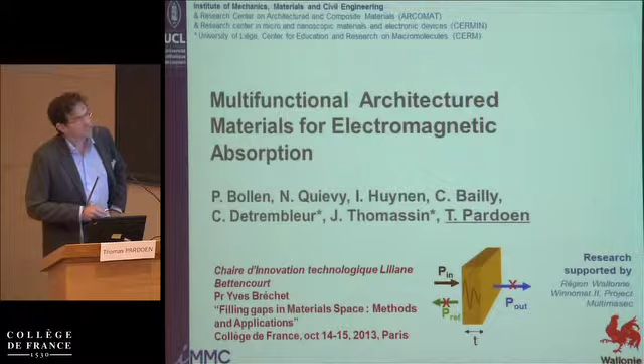But so I will start by acknowledging the collaborators. A major part of the work has been carried out by Pierre Bollen, who is a PhD student now in his last year of his thesis. And Nicolas Quievy was a postdoc. Isabelle Huynen, she is the one who knows everything about electromagnetism. Christian Bailly is a polymer specialist. Christophe Detrembleur and Jean-Michel Thomassin are chemists. So it's a group of a variety of expertise.

Before I introduce you to my preferred gap, I will explain you the general ideas of what we have tried to accomplish for the last few years. There are two ways to protect an object or human people or anything else to EMI, to electromagnetic interference, or to protect and to shield an object. The first one is the one you know the best, is just protect the material by a reflective layer such that all the incoming electromagnetic power is just reflected. And this would typically be the Faraday cage approach, where you use a metal and you just reflect everything.

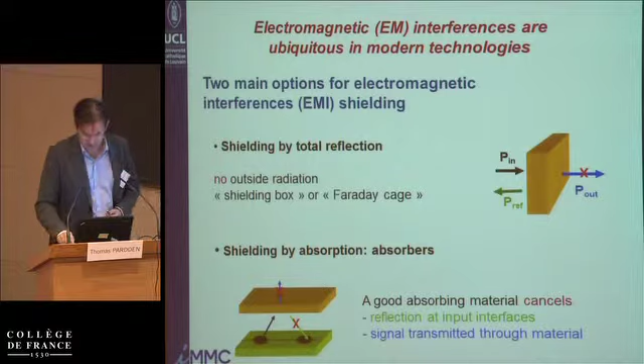The other approach, and I will explain you why it is sometimes interesting, is to absorb the electromagnetic radiation. So to let the wave enter the material and just dissipate the energy into the material. But 99% of applications are based on reflection. Now, why is it sometimes useful to absorb and not to reflect the electromagnetic radiation? First example is in microelectronic or power electronics application.

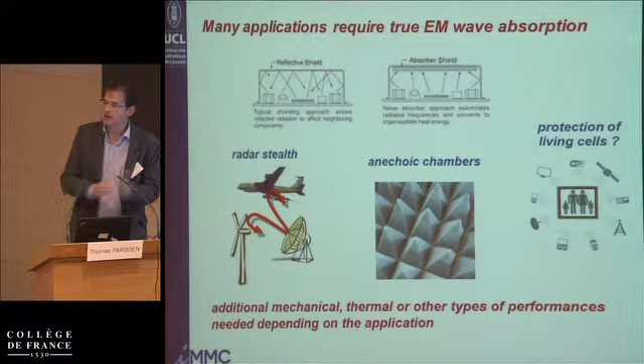The fact that you will put a sort of shield around the devices would lead to reflection inside the system. So for most applications, it's absolutely forbidden to have waves getting out of the system, so you will reflect, but you might have interferences from one device to another inside a chip. And so that means that the fabricant of these systems, they have to put barriers in between all the chips, and still like that they sometimes face some trouble. So it would be better to have in some application an absorbing material and avoid these bad reflections.

Sometimes also you can have problems like in windmills. For instance, it's known that windmills affect the radar operation. That's why you cannot put a windmill within a radius of 15 kilometers around airport. So around every airport, you have to draw a circle of 15 kilometers radius. And you cannot put a windmill, and this is because of the interference. So it would be a good idea to absorb the radiation and not to reflect it on windmills.

People working with electromagnetic devices and testing many different systems, they use anechoic chambers, and these chambers are designed with these very strange walls. You might have seen that before, such that the waves are absorbed and not reflected in order to allow calibrating devices and so on.

And of course, you know that there are claims that electromagnetic radiation might affect living cells. My colleague Isabelle Huynen is in one of the team in Europe who has been working a lot on this topic for many, many years, and they have mixed claims. So they have seen some evidences of disease in rats and so on, but it's not so obvious. But there might be, and I will not enter one of the favorite topic of Yves, of the principe de précaution today. Otherwise, this talk can last for hours probably. So, but there might be some aspect there.

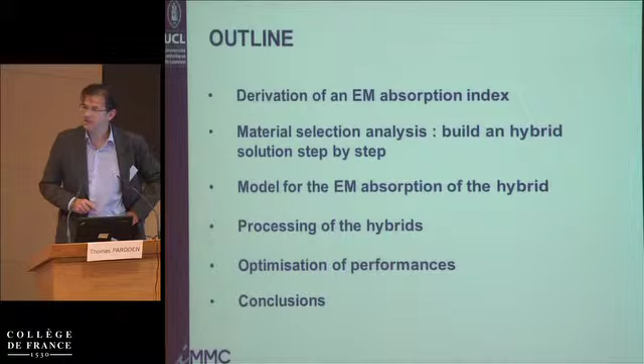Okay, I will start by showing you how we derive a material index, which quantifies the quality of absorption. And then from there, we will see if a material exists. And the answer, you know, will be no, to optimize this index. Okay, I will not enter the details of the analysis, but basically you have to use a line transmission formalism.

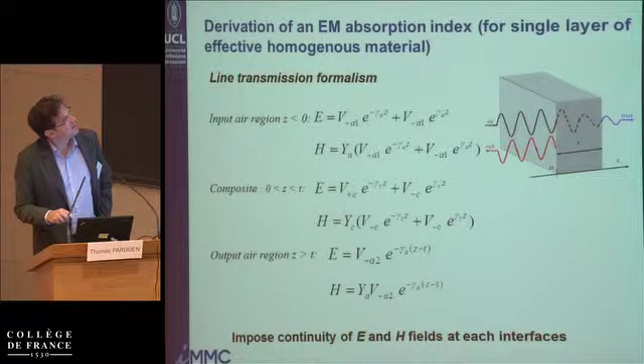You have an input signal, and this signal will transmit and reflect through the material, and you just have to set up the boundary condition to make the field, the electrical and magnetic field, equal at the entrance and the outside surface of the material. I'm not entering in the detail because you probably don't want to hear that.

But at the end, what we calculate is the absorbed power. The absorbed power is the input power minus the reflected power minus the transmitted power. So it is really the power that is dissipated into the material here. And we define the absorption index, and that will be the performance index of the problem. It is the absorbed power divided by the input power, meaning that 1 would mean that there is no power that is reflected and no power transmitted. So the goal is to be as close as possible to 1.

And at the end, if you work out the equations, and this is all analytical, you're getting a messy performance index, but still it is analytical. And you see that this absorption index depends on the reflection and the transmission. And the reflection and the transmission, they are both connected to the effective dielectric constant of the medium. And at the end, the effective dielectric constant is a function only of the dielectric constant and the conductivity of the material.

Plus, unfortunately, you cannot decouple this performance index from the frequency and from the thickness of the medium. So the thickness enters the transmission here, little t is the thickness. So there are two system parameters entering the performance index. It's not possible here to extract only the material properties.

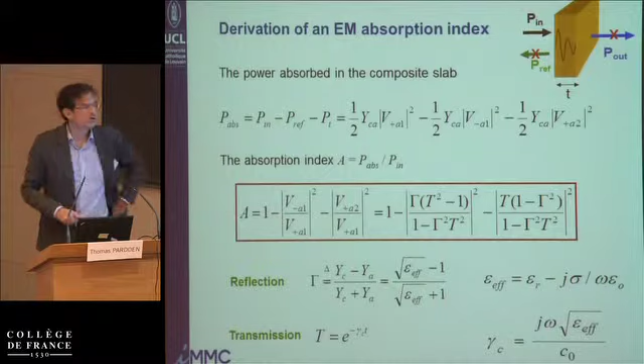Okay, let's see what this performance index tells us. So we have to fix the frequency. So let's take 10 gigahertz, and let's fix the thickness of the material. And then for these two numbers, let's calculate the value of the performance index in the dielectric constant–electrical conductivity space. These are isocontours of performance index, and when it's red, it's the closest to 1. And what you see is that there is a very clear, very narrow region where you can reach high energy absorption. It's around 1 Siemens per meter, and it's for the lowest possible dielectric constant of 1. This is where you want to go.

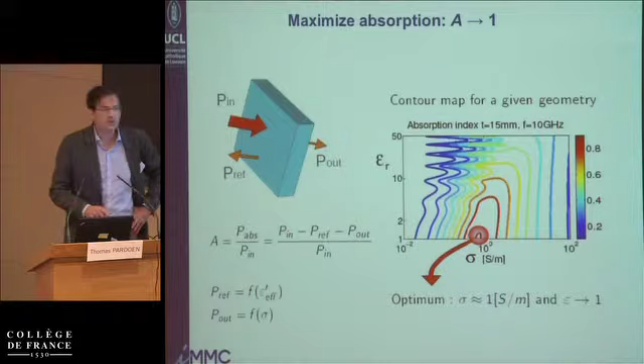Now, if you change the thickness, you will just change the magnitude of the absorption. So if you increase the thickness, you will just get more red here. And if you change the frequency, you're going to shift left or right the optimum conductivity, but not that much, just by a decade or two, not more than that if you change many decades in the frequency range.

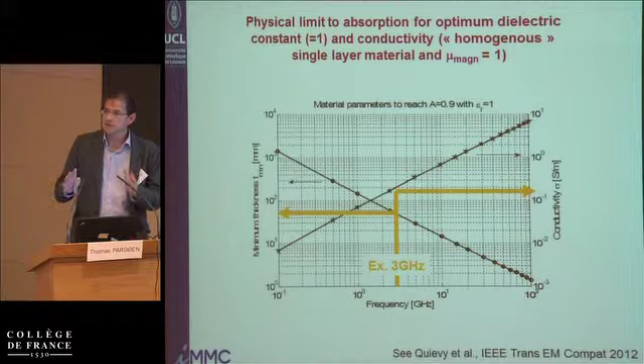This is a plot where you see what is the optimum conductivity depending on the frequency, and what is the thickness that gives you the absorption index you want to reach. So if you want to reach 90% of absorption, and say you have a material that has a permittivity close to 1, you need a thickness of here 50 millimeters, and you need a conductivity of something like 0.2 Siemens per meter. Okay, so depending on the frequency, the optimum conductivity will change.

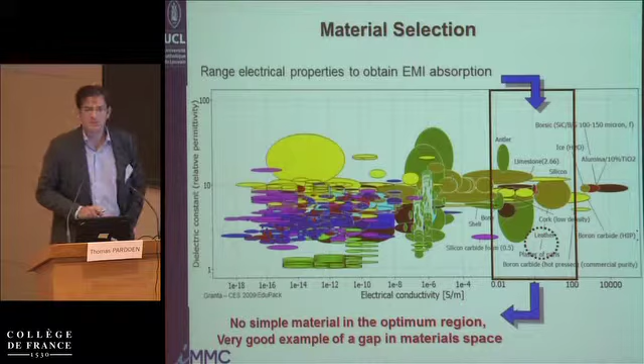Okay, let's see how we can select a good material for that. We use EduPack here, and we plot all materials, dielectric constant as a function of electrical conductivity, and this is the area where we look for an optimum value. I've made a more simple schematic plot here, and you see the different families of materials, and you see the range of optimum absorption here.

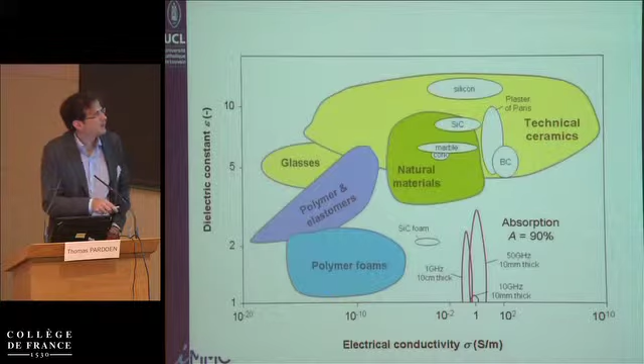And this is the gap, where you see there are no materials. There are a few materials that are not too far, but the region in which you can get high absorption is so narrow that all the materials around basically have zero absorption capacity. So you really need to have a very good control of the electrical conductivity to reach this area. The closest is leather, which in terms of absorption would be the closest. I've not drawn it, but natural materials are the closest, and silicon carbide foams should be the closest.

Okay, so our strategy was the following. In order to fill this space... This is the way I reinterpret what we have done. Of course, we have not followed that logic. It's now easy to present it this way.

We started with polymers, which have a low dielectric constant, and added the right amount of carbon nanotubes in order to increase the conductivity in the range of a Siemens per meter, which means about 1% or less of carbon nanotubes, so not a lot. And you need to control this very well.

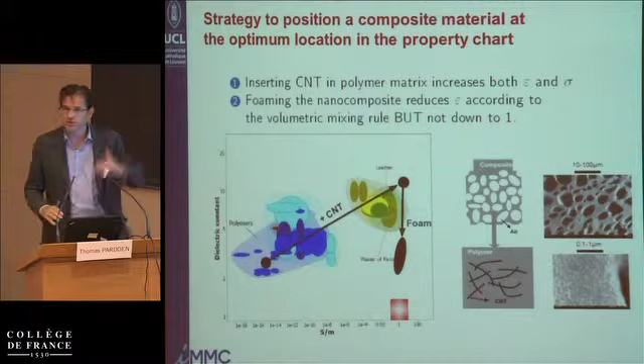Unfortunately, when you increase the conductivity by introducing carbon nanotubes, you're getting a higher dielectric constant. So in order to reduce the dielectric constant, the idea was to foam this nanocomposite. So mix of polymer and nanotubes, then foam it, and by just a law of mixture, you're reducing the dielectric constant. Not to 1, unfortunately, but 2 or 3, depending on the material.

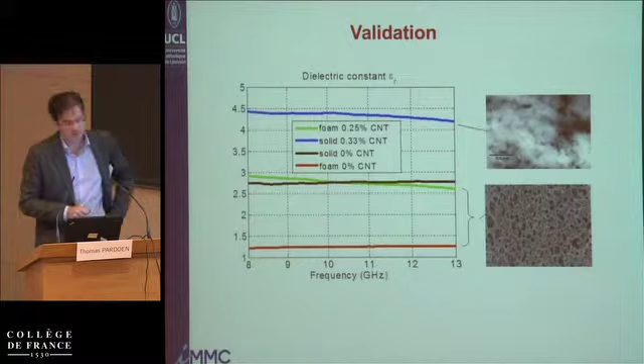I have examples here where you have in black here a solid material without carbon nanotubes, so not the right conductivity, and then you make a foam. You see that the dielectric constant is decreasing in the entire frequency range. Here it's in gigahertz, and you see now for the solid material with carbon nanotubes and the drop when you foam it in terms of dielectric constant.

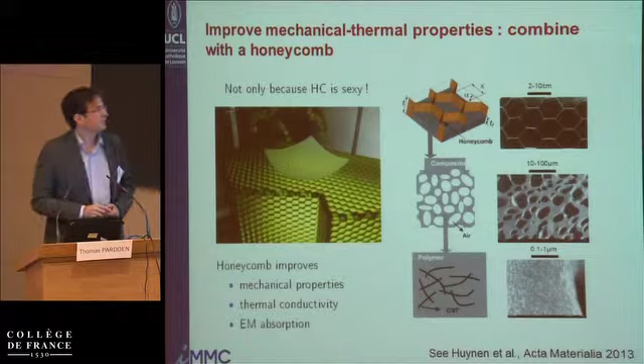Okay, but like I said, it was okay. We could get relatively good absorption, but the question was, can we do better? And the idea was to mix this foam with aluminum honeycomb. Initially, the idea was only for mechanical purpose. I thought that by putting this foam inside the honeycomb, we could improve the mechanical properties while not changing the electromagnetic properties. And the good news is, by introducing the foam inside the aluminum honeycomb, we also got an improved electromagnetic absorption.

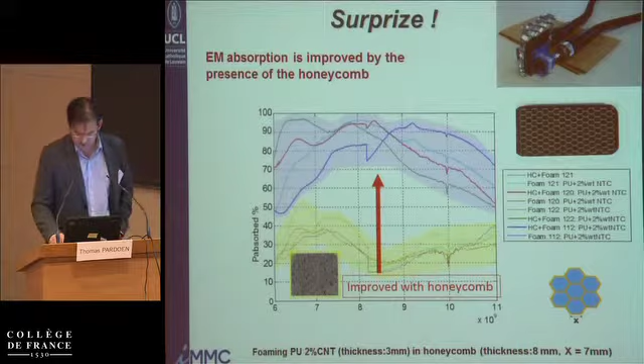And my colleague Isabelle Huynen and myself, we worked on trying to set up a model to explain why we are getting this improved electromagnetic efficiency. And the reason comes from a waveguide effect. The aluminum honeycomb is playing the role of a waveguide, and by this effect, is sort of reducing the dielectric constant of the medium. I will not enter into the details, but once again, we can get a closed form expression for the new effective dielectric constant of the medium, and so the material is not a complicated material, it's a foam with carbon nanotubes inside a honeycomb, okay? It's all analytical, and the result is the following.

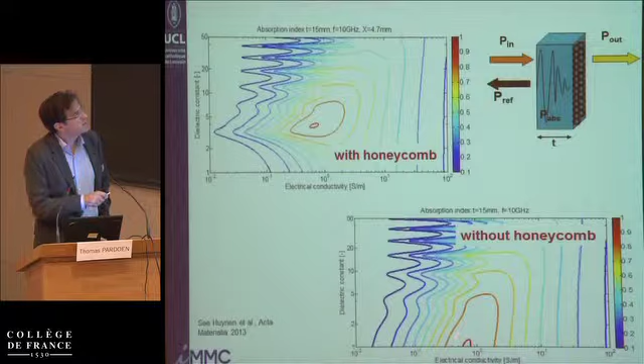If now we express the contour plot again in the same space, with the honeycomb compared to without the honeycomb, you see that the optimum effective dielectric constant of the medium, owing to the aluminum honeycomb, is moving up to values between 2 and 5. While earlier we had to reach 1, which we can't, of course. We would need open space to do that. So now it's possible to reach the optimum point owing to the presence of the aluminum honeycomb.

So Pierre prepared several samples of aluminum honeycomb filled with the foam. And you see the experimental results are, of course, with the scatter, and it has to do with the way the experiments are performed. It's not because Pierre is not agile enough.

When it's written model, it means the analytical model, and we confirm the validity of the analytical model using finite element simulation. The good news is the analytical model, of course, can be used for optimization, which is more difficult with FE simulation. And you see here, very good absorption for this size of honeycomb in a range above 3 or 4 gigahertz. Below 3 or 4 gigahertz, depending on the size of the honeycomb, you have the cutoff frequency, and there is no effect anymore of the honeycomb, and basically then waves are transmitted.

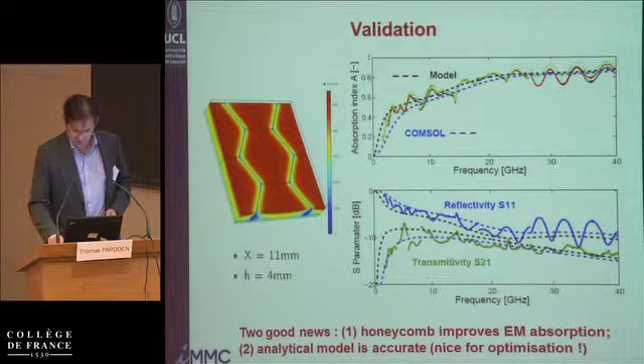So these are other examples where it's a combination of analytical modeling and finite element models for the absorption here for a 2 millimeter honeycomb and for a 0.9 millimeter honeycomb size.

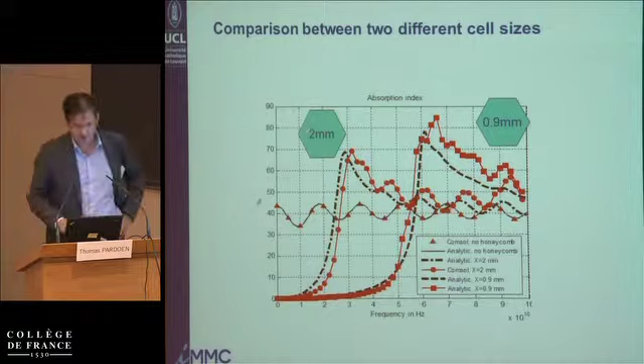Okay, how do we make this material? It's not that difficult. We have 2 different approaches to do that. You can either make the foam inside the honeycomb, or make the foam and then insert the foam mechanically inside the honeycomb later on. In order to foam the material directly inside the honeycomb, we use either a supercritical CO2 approach, and these are the colleagues of the University of Liège who have developed this method. This gives the best foam, but it's more complicated, of course, to play with this technique.

Or we can use chemical foaming, but then, of course, it gives rise to a foam with larger pores, and the mechanical properties of the foam are a bit worse. The other approach is mechanical insertion. We make the foam, and then we press the foam inside the honeycomb. Our preferred method up to now is chemical foaming.

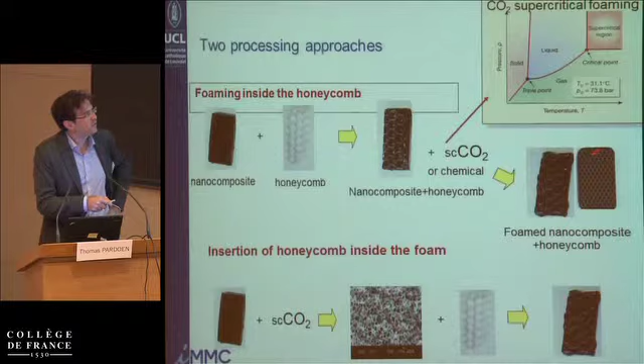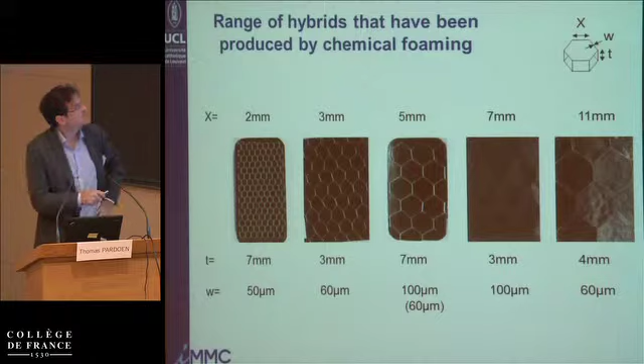And these are examples of material samples that have been produced. And right now, what Pierre is able to do is a square like 20 centimeters by 20 centimeters, which looks like this, so much, much wider. So different sizes, different thicknesses to play around. All right, so this is the multi-scale structure of the foam. And I will say now just a few words about the other properties, of course.

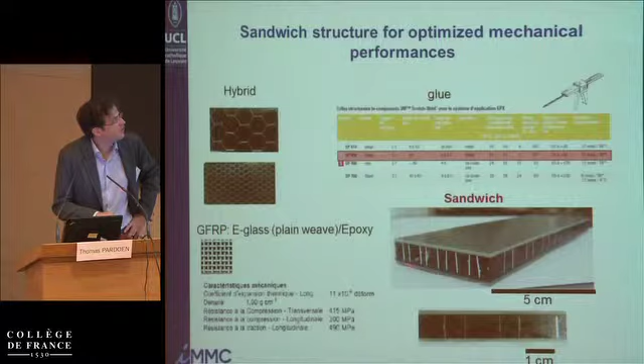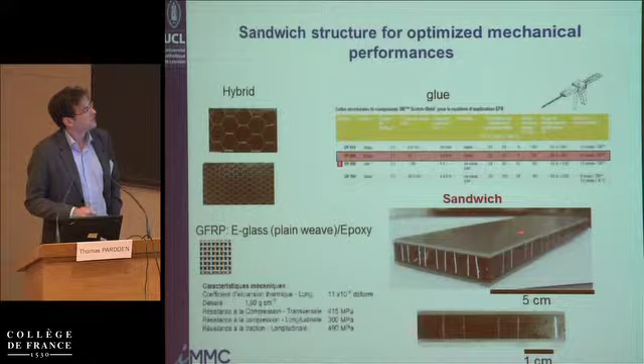Electromagnetic absorption is okay, but we need to reach other performances in order to make this material useful in different applications. So in order to meet some mechanical requirements, for instance, for aeronautic applications, we introduce this hybrid material as the core of a sandwich. So this is the core material, and we use glass fiber reinforced polymers as face sheets, not carbon fibers or metals, otherwise we just lose the entire absorption capacity of the material. We would reflect, again, the incoming power. So we use glass fiber material.

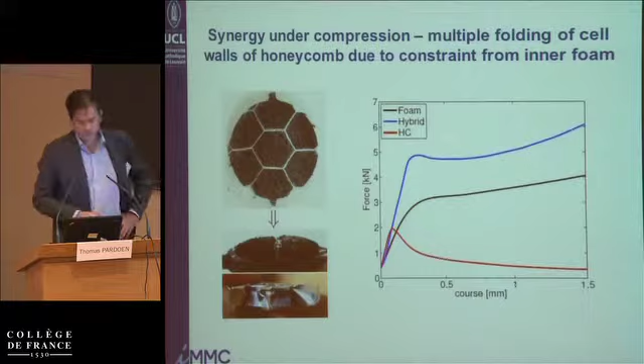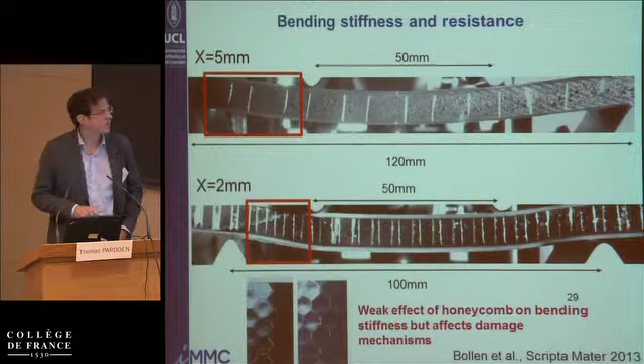We have performed bending tests on different sizes of honeycombs and different thicknesses in order to evaluate the bending modulus, as well as to detect the failure modes. And the failure modes are indicated here. Depending on the orientation of the honeycomb with respect to the bending, we're getting either decohesion between the foam and the face of the honeycomb, and then finally decohesion of the face sheet, or sometimes we can have decohesion in between the layers of the honeycomb.

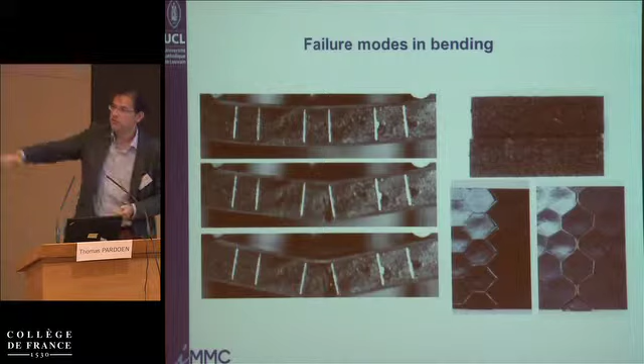Now, one good point that we realized a few months ago is the fact that owing to the foam inside the honeycomb, it's much easier to bond the face sheet compared to the classical strategy where you have to bond a face sheet on a honeycomb. That makes the adhesive bonding more complicated because you're just bonding on a small edge. While when you have the foam all inside, you have a full surface to improve the adhesion.

It's better also, and for the range of parameters we have tested, we avoid complete penetration owing to the presence of the foam. This is for mechanical properties, and there are some reports in the literature explaining how to optimize a foam-filled honeycomb, and perhaps you will not save mass, but you might save in terms of the thickness at the end. So for applications in which you want to decrease the thickness of the sandwich, it's interesting.

Now, in terms of conductivity, I don't know what's the time. Because... okay, just a few words about the conductivity.

Of course, the conductivity, we have played with many different polymers: polyurethane, polycaprolactone, polycarbonate, but of course we have here an insulating material. The additional conductivity coming from the carbon nanotubes is extremely small. Even though we have electrical percolation, the way heat is transported in the carbon nanotube networks is very poor. So basically, it's an insulating material. The only heat that is transported really is through the face of the aluminum honeycomb.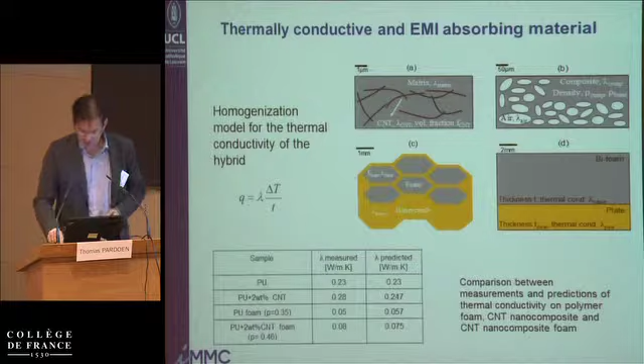But of course, you could play around and even improve the insulation by replacing the aluminum honeycomb by a Nomex honeycomb and metallize the surface of the Nomex, which would give the insulation of the Nomex material, or polymer-based honeycomb, and still have this waveguide effect by metallizing the surface. So we really played the game of looking at some optimization, for different kinds of constraints, different objectives, different variables. So this is just one example to show you that you can push the strategy using the approach of Mike Ashby until the end.

If you look at a material which absorbs electromagnetic power and has optimal thermal dissipation, you can set a value of absorption, 90%, 95%, as a constraint, and then, for instance, maximize heat flux, or minimize. Maximize would be for a thermally conductive material, which is not the best for our material. And the performance index then becomes a thermal conductivity divided by the thickness, and the thickness is hiding the absorption capacity.

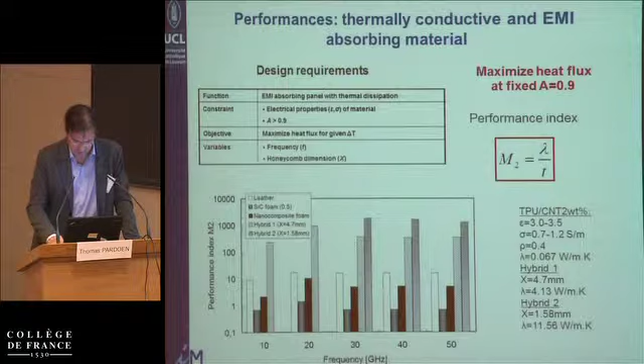So for every material, you look at the dielectric constant and electrical conductivity, and in order to reach an absorption of 0.9, you will get a value of the thickness. As a matter of fact, for most materials, the thickness will be infinite because they have no absorption capacity. There is a narrow set of materials for which you will have a value of the thickness, and then this is a comparison of the performance index for different materials, the leather, silicon carbide foams, and so on, compared to our hybrid materials. And the material is doing a fairly good job to optimize the performance index, even if it's not the best application here, because it's more thermally insulating than thermally conductive.

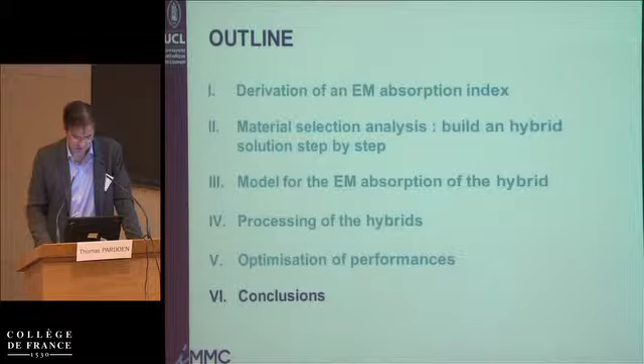Okay, as a conclusion, this is the hybrid architecture that I have presented for filling this gap in the dielectric constant electrical conductivity space, where you have a sandwich. The core of the sandwich is a honeycomb, and the honeycomb is filled with a foam, and the foam itself is a polymer reinforced with carbon nanotubes. You have seen that the range of frequency where we can absorb is above a few gigahertz. This is fine for many applications. Cellular phones, radar, many radars operate in the range above 2 gigahertz.

There are some applications where it would be nice to absorb below, and Pierre is working now, and this is the end of his thesis, on a metamaterial approach where we develop a concept where you can have a dielectric constant below 1 and permeability below 1. I think my time is reached, so I'm just showing you this image of what Pierre has recently performed.

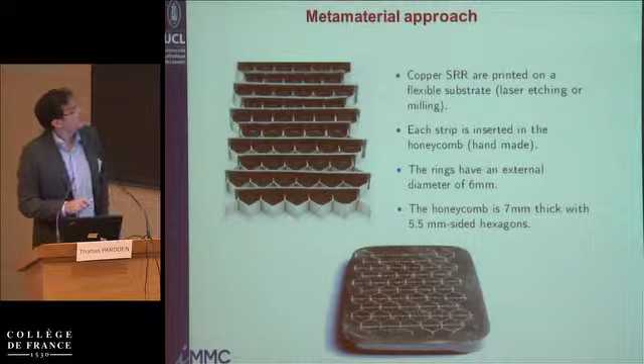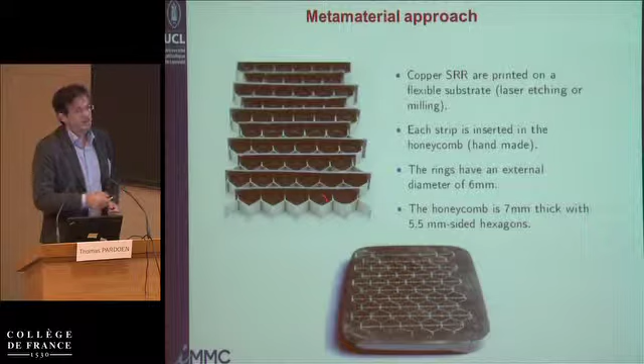On top of all the material here, he is also introducing some thin copper rings inside the honeycomb, and there will be the foam around. And this ring is adding an extra capacity into the system and transforms the material into a metamaterial. And by doing that, he is able to get an absorption peak below the cutoff frequency that we have. So it's not as good as what we have above 2 gigahertz, but it opens some avenues to also absorb below the 2-3 gigahertz range.